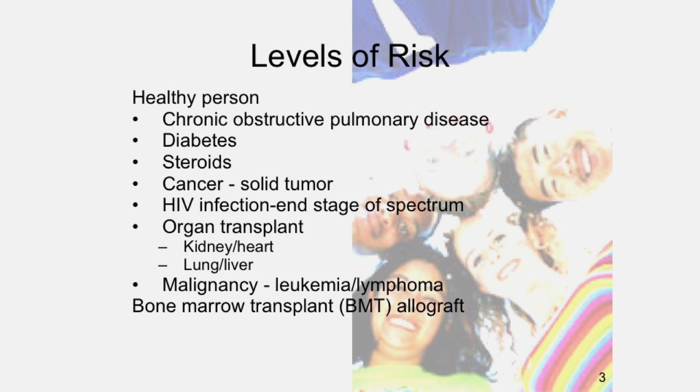Slide, please. What you see during construction is risk. We certainly focus on long-term convalescents, ICUs, immune-suppressed patients that are classified for the reasons that we see surgery, radiation, high-dose chemotherapy, catheters, and areas where we do equipment cleaning. We need to be aware of those, and the procedures in specified areas become an issue, especially if we create a depressurized negative pressure zone to do some kind of effort, and we certainly will recognize those as we go through this. The procedures at bedside or specified areas are really what are important to realize if there's going to be a breach in the competency of protection in that zone.

Issues for environmental infection control, utility outages. How do we do them? How do we plan for emergency outages? Do you keep a 50 horsepower motor around that, as always Murphy's Law would have it, would burn out when you're under construction or under renovation?

Ventilation management, and it's always important to remember the simplest approach to this is to maintain clean to dirty airflow. Patient areas are clean and the construction zone is dirty, so I don't like the term negative pressure rooms, because one side of the door is negative and the other side is positive, and which one are we talking about?

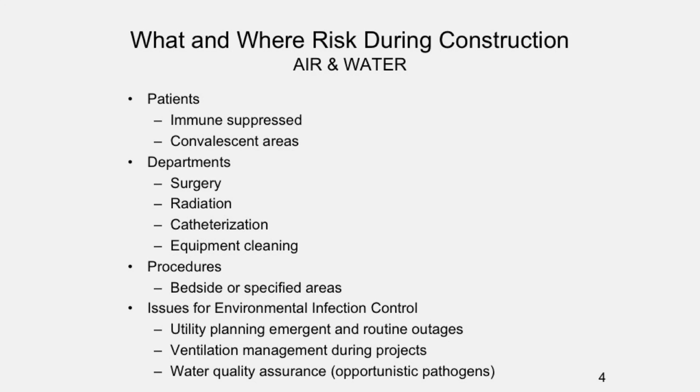When we look at internal construction, which is what we're dealing with in renovation, we really need to be aware of the highest risk times, and preparing the site is one of those. I worked with a facility just recently where during that discovery period, reclaiming the Pyxis machine or some other device that's been sitting around for the last 20 years, suddenly you move it and see what accumulates behind it. I'll show you some graphic pictures on that very shortly. So it's a matter of being aware when the risk is greatest.

When we salvage things off the walls, like toilet bowls in some institutions, what's left behind is a moldy piece of material that unfortunately a lot of institutions don't prepare for by making the seals and barriers before we start removing those things. So that's discovery, and during discovery you end up finding a lot of different things.

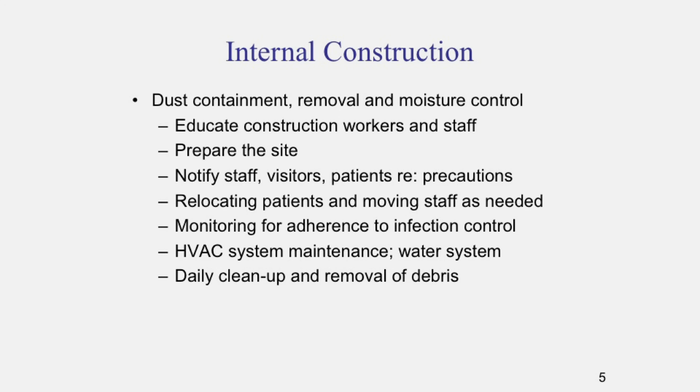Barrier management, next slide, is really the name of the game. So is it solid or plastic? We tend not to use plastic because some folks are arrogant enough, or dumb enough, I'm not sure which way that goes, that they walk right through the plastic barrier. They think they're more important than anything.

I've seen it where physicians and medical staff cut through a construction zone. That's one of the reasons why we use solid barriers and locks on those zones, simply because we can't have anybody getting hurt in an area where they're not trained to walk through and deal with the hazards in a construction zone. So frame barriers, tape barriers, ceilings, doors are all things worth talking about.

But the important thing to recognize is smoke control. We'll get into that momentarily, but it's all about pressure management. Pressure management is infection prevention. You control the way the particles move, regardless if they're human-generated or construction-generated.

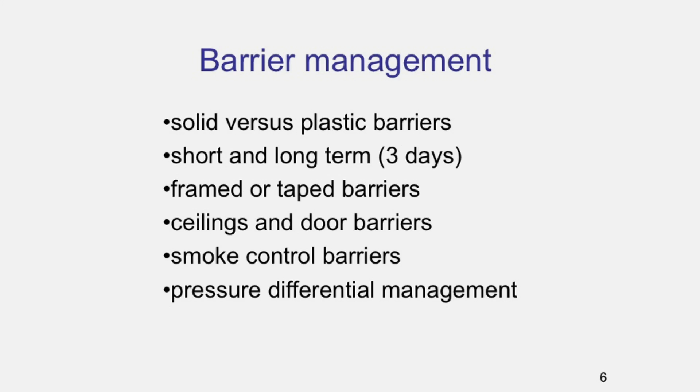The next slide shows a variety of barriers. The middle one up on top was used to mitigate a mold source in some of our walk-in coolers. When universities and big institutions cut back on the temperature of chill water, it exceeds the ability of the chill water to remove the moisture. That moisture moves downstream and finds a colder spot, which is our walk-in coolers, and we end up with moldy boxes. That's unfortunately sometimes what we need to be aware of.

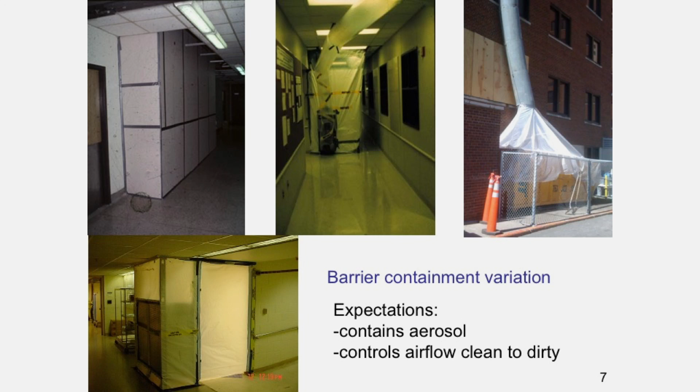Whether or not we have chutes containing the dust, or double portable filters like the lower left-hand corner, those were in a pharmacy during remodel for the 797 requirements, and we needed two of them to maintain the negative pressure simply because there were so many leaks in that space.

Recognize that anytime we go into a space to do major renovation, which is what I'm talking about, we go into a period where we disengage the fire alarm system because of the aerosols and the welding and that kind of stuff that are normally generated during a renovation project, and that is interim life safety.

They both work for the same goal, controlling the aerosol. In one case, it's something associated with construction. In the other case, it's something associated with smoke control.

So that is a very beneficial concept that does not add cost to the project, but requires fire watches, requires extra sensitive management, and the security staff can be trained to simply look for two things: which way is the air moving, and is there any water coming out from underneath the door?

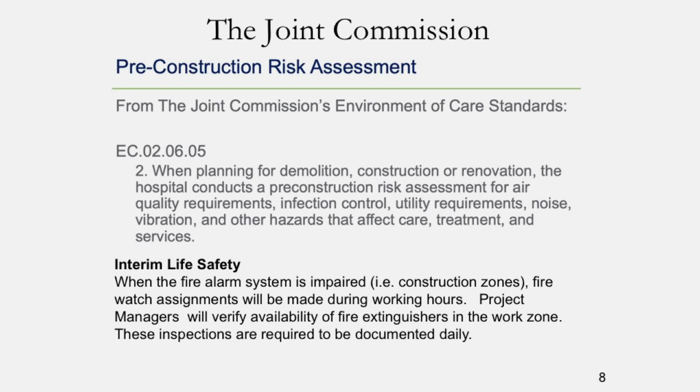Very important. Likewise, on the next slide, slide 9, we have what we used to put on all of our demolition details when it came to plans and plan review by the contractor and ourselves, stating some pretty simple things. I underlined a few of them that I think are important - one, dealing with notification and knowing that infection control has a say.

We also want to make sure there's training by the individuals coming in and doing the work. Likewise, we request and insist, except maybe for critical barriers like fire barriers, that flutter strips or some kind of airflow indicator be put on our barriers so people recognize what's going on and evaluate that appropriately.

Portable filters should be used. They work, we'll talk about that. We should coordinate debris removal and get the stuff out of the building expeditiously, but not necessarily during peak work time. So we need to think about the best times to move supplies in and out. Is that premium time, afternoon, or morning time?

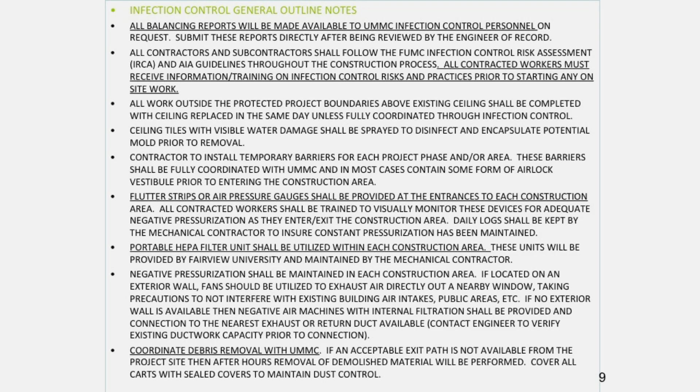These are some of the issues, and I'm not going to look at all of these and consider them. You can read these at your pleasure.

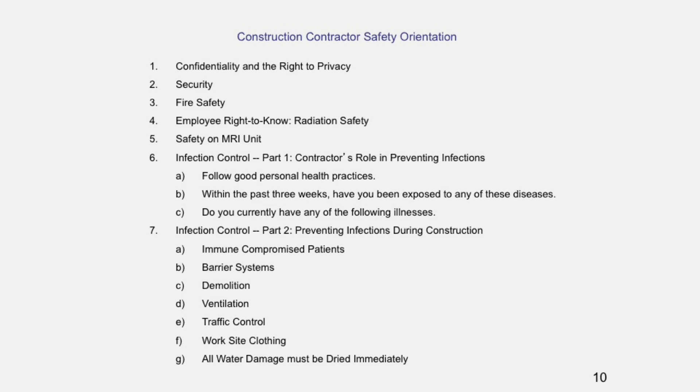So what we have is a first day, first hour format. Every contractor, every worker needs to come in, sit down, and listen to a whole variety of things, which you can read here, looking at what we need to consider for the contractor, as well as prevention of infections during construction on a variety of issues. It's roughly a 15-page document, and unfortunately that's often all they get. Having done this a few times, those eyeballs go smashing down in the middle of that, and the comprehension is concerning.

Looking at slide 11 and the practice of spreading these germs, again, is really important to understand, especially the chain of infection. I can see the eyes closing now.

We want to put one thing in everybody's mind: in our situation in the United States, if the Joint Commission comes in for review and interviews the workers in that construction zone that they walk by, and asks that construction worker what they do for infection control, it's written in red on this slide. So we can always answer: wash your hands. They might not be able to recite everything covered in this training program, but they can certainly say that.

We are concerned by the fact that some construction workers in Virginia some years ago complained that one of them developed tuberculosis while in the hospital. But infection control practitioners, being astute, reviewed the records and said we had nobody in the hospital at that time that we knew had a tuberculosis infection. So again, where did they pick it up? McDonald's, Burger King, the hockey game? I don't know. So again, we need good records and cooperation between both groups.

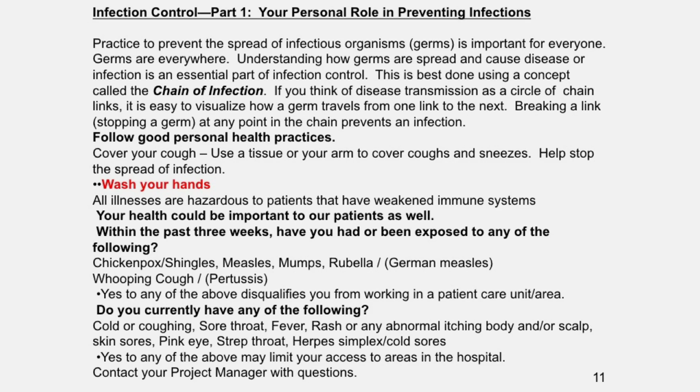On slide 12, we start getting into the patient issues and bad immune systems, ones that aren't functional, and some issues on dust, barriers, vibration, noise, and that kind of stuff. Again, the eyeballs are starting to get heavy because they have a lot of things to worry about, and it's been cold outside, they've got heavy clothes on. And again, what do they walk away with? That's why training becomes such a huge issue, and extracurricular training outside that institution is important to understand.

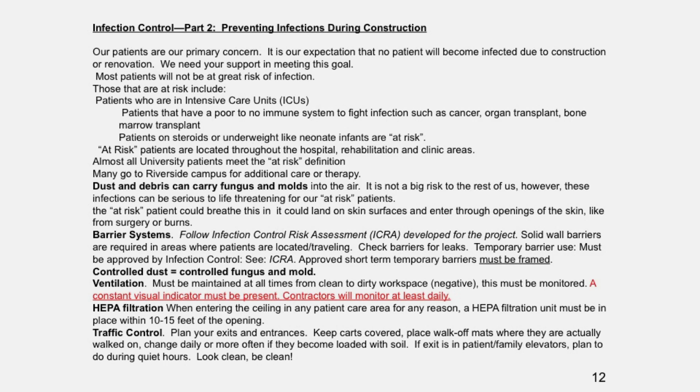It also recognizes, this document recognizes, the high risk areas and what we should do. Slide 14, we really look at a risk assessment.

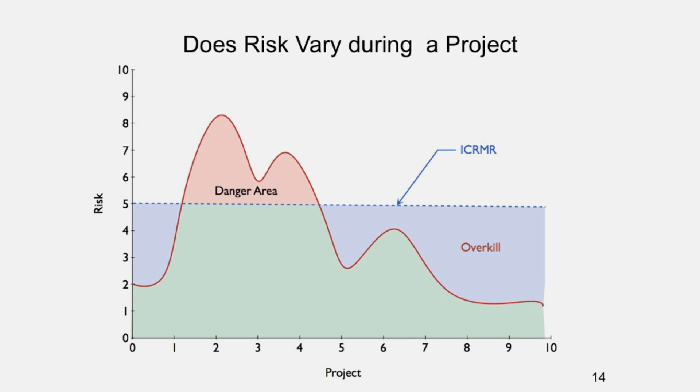If it's 100% risky, it's on the left side, or on the y-axis. If we have phases of the project on the x-axis on slide 14, we have a variation in the risk going up. As we tear the unit apart, as we do demolition, slab to slab, wall to wall type of effort, and then start to build back, the infection control risk mitigation response starts to drop. But this is variable, extremely variable.

If, during the middle of the project, someone needs to flood the floors upstairs and the water comes raining down, all of a sudden the risk goes up, or a flood occurs, like a sprinkler head breaks - that can happen - and that may change the risk factors in 8 and 9.

Being able to make that risk mitigation response is something that is expected in the environment of care and CMS, Centers for Medicare and Medicaid Services requirements. It's important to be able to respond and understand what risk is and how it changes.

Looking at disruption avoidance planning, these are examples of two written word signs, if you will, projects that our contractors put together, indicating how equipment was going to come in and out, what the hours of operation are, and who to contact.

Which are all listed in that space. Some of the special precautions include protecting the floors. The one picture on the right is when we were putting in our hybrid operating room with CT, with very careful instructions on how to get in and out of the operating rooms and avoid disruption.

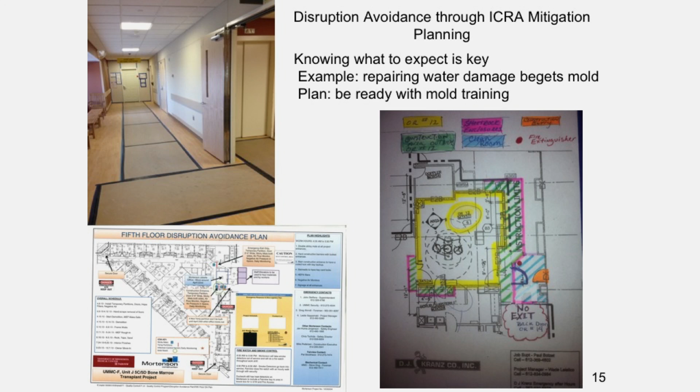I wish I could talk about this project as a case study, because it was an interesting recognition of things we did that were good, and things that we didn't do that created additional problems. This particular project was fascinating because they had to reinforce the steel to hang that CT scanning device, and the iron workers did the impossible, trying to put 1-ton beams into the structure to hold up the device. I have the greatest respect for the work that they do.

In slide 16, we can see what was the first usage of portable filters. I think it was the first publication we put out in 1983 that describes how portable filters can be used to protect. We were lucky, had 12-foot ceilings in our bone marrow transplant unit, and we were able to hang it on the wall with a large volume of air change rates, and with data that I collected inside.

This became the evidence, if you will, that demonstrated that before you turn it on, there's lots of junk in the air, but after a few air changes and after 36 minutes at the air change rate, they pretty much ate up all the particles in this particular demonstration. So we know they work. They just don't work against anything that's coming in from the outside unless it's a really small leak.

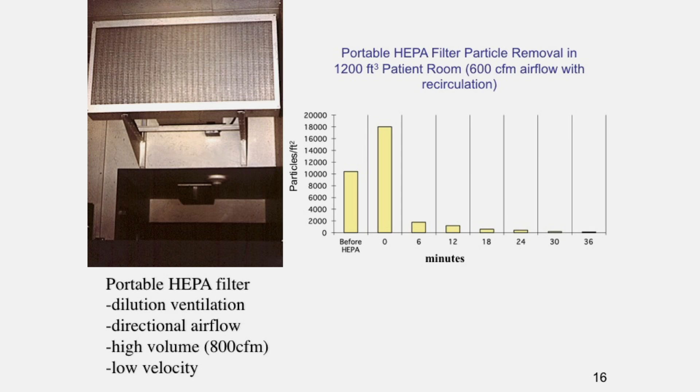So we have to know how they work, and certainly there are a whole variety of portable HEPAs around in slide 17. We have ones that recirculate the local air. In the lower left-hand corner is one which we are using when we're putting in an access panel for getting MRIs, our magnets, in and out of the building because they change as things improve.

So portable filters are important for air delivery. High filtration gives us a dilution ventilation. Of course, the solution to pollution is dilution, and it is something that is very useful to reduce the possibility or the probability of breathing a harmful spore or other kind of harmful agent. The volume output is really what we're looking for to determine the air change rate.

There is a noise factor. We do have HEPAs, which are 99.97, and they want to be sure they're adaptable for multi-usage, and that's really what we see.

Looking at slide 18, here we're doing some work in the control area of the operating rooms, and it is a sensitive area, and we actually attached the portable filter to the structure. If you could look up by the exit sign at that blue spot, that is a nickel's worth of flutter strip.

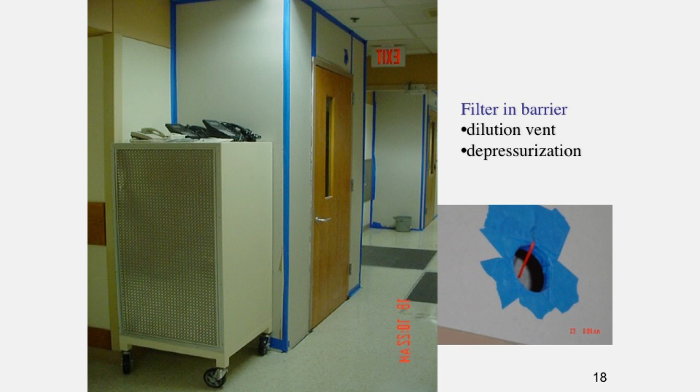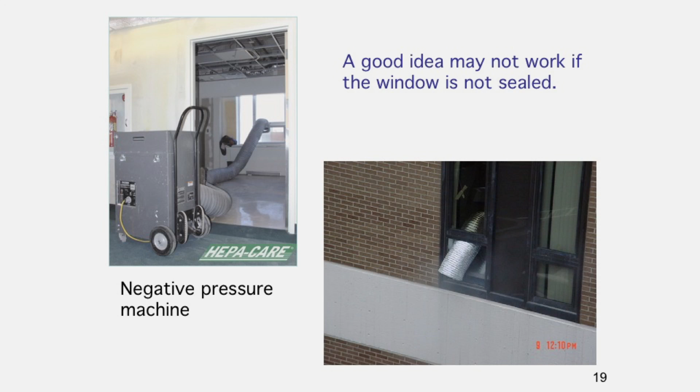All of the rooms were positive where they had the negative pressure machines. It was blowing out into the corridor. Fortunately, what they were doing was paint. They were painting, and so paint particles were coming out. But again, there's a need for training. Likewise, there's a strong need for training on how to put up barriers.

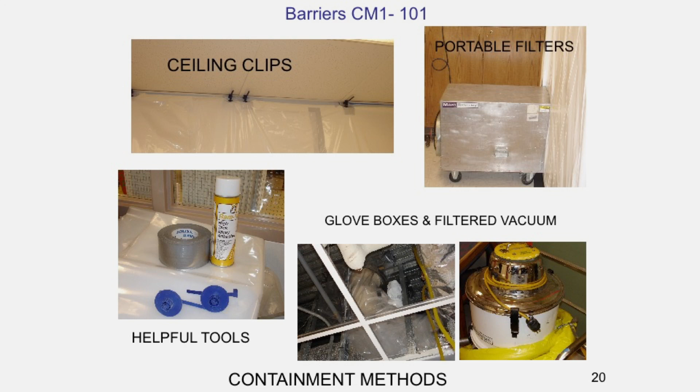We were putting up barriers here to deal with, in the bottom center picture, roof sink drains and roof drains. We had to do that right in the clinical space during daytime, with good barriers, portable filters, and HEPA-filtered vacuum cleaners, and a knowledge of how to use helpful tools in putting up that barrier plastic. It becomes essential, especially if it has to be done during daytime hours, and there's no reason it can't if the individuals are trained, especially on a short project.

What we're most proud of is the fact that the carpenters in North America, through their union, created a best practice in healthcare construction. This training has pretty much taken away a lot of the work I used to do, because it's now available from the carpenters unions for nothing.

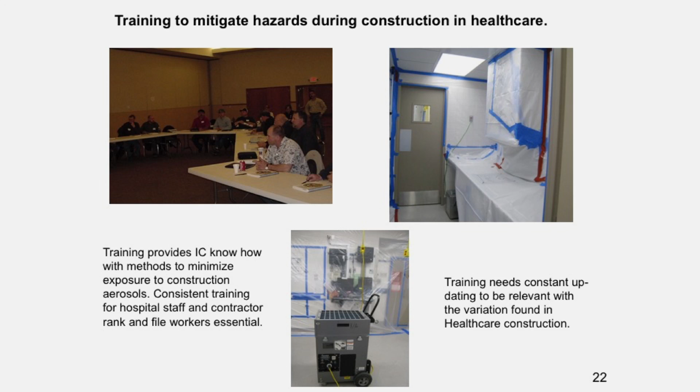The next slide, 23, shows what you find when you start moving equipment. Some of the riskiest times are when we salvage the equipment — computers, refrigerators, toilets — that kind of thing. Dialysis cabinets are a notorious place for water damage. Our sustainability efforts are to put water-resistant rock around every water source, including dialysis cabinets. At an institution in California a couple days ago, we really stressed this as a sustainability issue, especially for patient safety and employee safety, because as we move that equipment, we don't know what we're going to find.

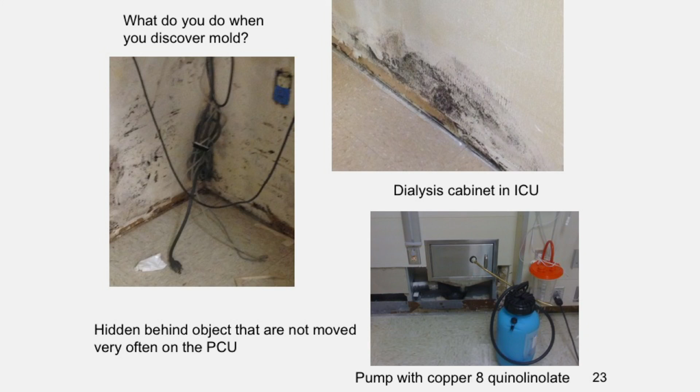I've got more examples on slide 24, where we have leaks from our cooling coils. We remove sinks from our ICU, and what do we find on the gypsum board in back? Mold growing. So that's a moist environment, and again another reason it justified putting water-resistant rock on those surfaces. Books can get wet too — oh my gosh, this is one they didn't want to throw away, but they had to.

Likewise, the MRI table support — that's all Aspergillus fumigatus — and the carpenters didn't know what in the world I was talking about. But they understood it was a risk after I finished, and it certainly warrants good training on how to mitigate that, which would be simple: a detergent in a bottle of water, sprayed as a fine mist. It locks it down just like it locks any kind of particle that is water resistant. It cracks and knocks down the surface tension in an effort to do that.

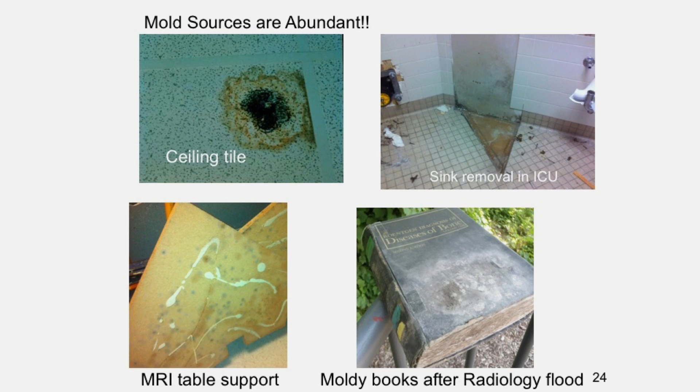Next, slide 25 has to do with airflow indicators. We want to see, as shown in the indicator in the middle on top, the air blowing in the wrong direction, which indicates a need to look at it. In that case, a fan became unplugged that was supposed to exhaust the air. The standard is the metal one in the right-hand corner for our institution — that's what we put on all our barriers as an indicator. It's reusable and unfortunately somewhat expensive, but that's what we want to demonstrate.

And the bottom chart recorder, the disadvantage of that is they use it over and over and over again. You don't know what you're looking at in many instances.

Slide 26 is a picture of a barrier being used on our bone marrow unit, and the significance of that is the whole aspect of perception. Mom walking by outside wonders why are you working on my child's room? Oh my God, how do you answer that question? You have to do it. If I show up, and I've had to do this many times in my career with these environmental containment units or whatever efforts going on in our bone marrow wards or other places, then you need to have an explanation for why you're doing it. That's why it's important for staff to do that.

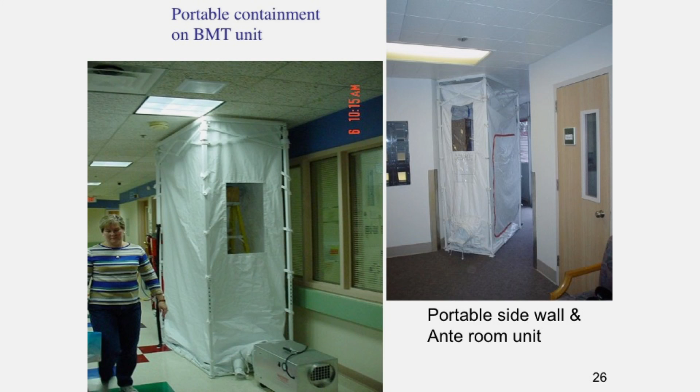There are a variety of these kinds of units, ante room units, and there are also those that when you work on something like a cooler, because the condenser doesn't work anymore, you're not cooling the water, you open it up and suddenly find it full of dust. We can certainly use these containment units or some kind of barrier or portable filter management for that work when they need to work in that area and clean it up before they start taking it apart.

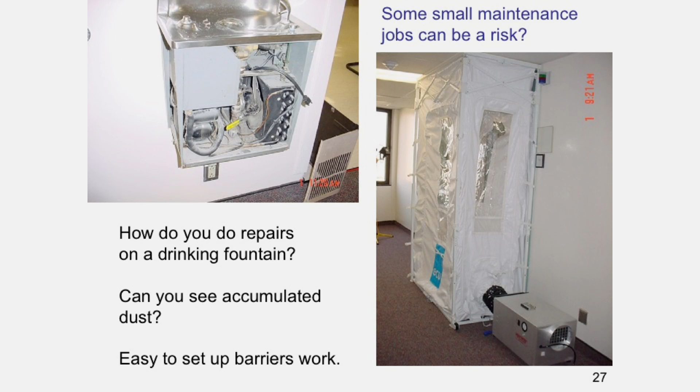We also have fun with our barriers in slide 28. This was a Carolina hospital in a pediatric ward. They made a cute little plaything of that, but then another individual gave me a picture of how not to use a portable filter, and you never want to dry... you'd be amazed what's on that mop. I have many stories about that kind of thing.

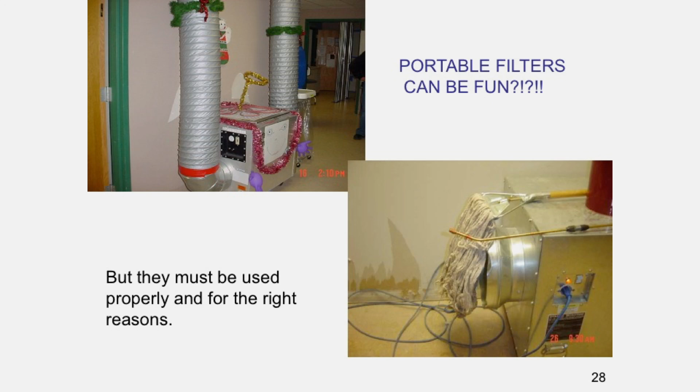What we did some years ago on slide 29 is got money from Homeland Security here in the States and put together airborne infectious disease management methods for temporary negative pressure isolation. Temporary negative pressure isolation is exactly what we do when we do construction, and I actually put a sentence on the first pages that says these are the same methods you use not only for containment of bio threats, out clusters of infection or epidemics, but it's also something you do during construction, so you can practice how to do that. And we expect our carpenters, if they're volunteering, to come and help us put together additional isolation wards if that's what the plan calls for.

You can get this, it's free. It's taxpayers' money, that is on the bottom. I think I checked that, it still works. We've distributed it around the world to show people, through the World Health Organization, how to use duct tape and plastic, and it does provide some useful guidance when work is done.

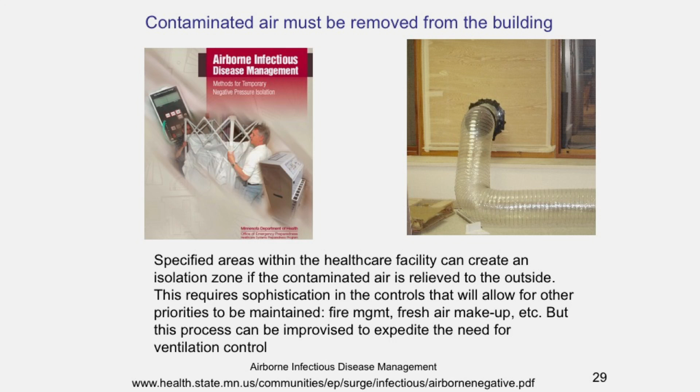So you need policies and procedures. You should have a statement that says they're routinely evaluated, and the volume output should be determined, and that's Q equals velocity times area. So if you've got a 2-foot by 4-foot opening on that portable filter and it's moving 100 feet a minute, you've got 800 cubic feet a minute that you use to determine your air change rates. There's a criteria in here for checking the filters as well as looking at the output in locations, as well as how to maintain it.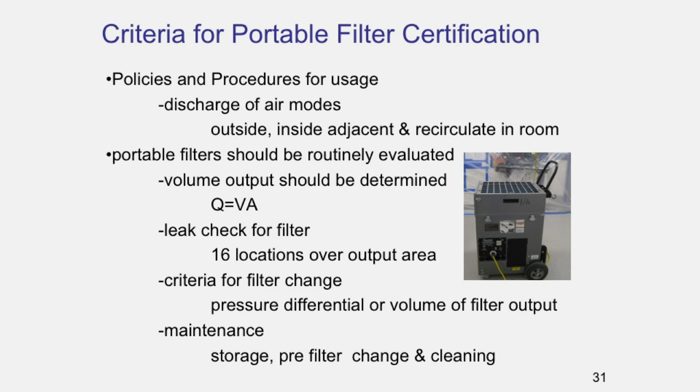Slide 32 is an example of a policy, a protocol that a mechanical company had to follow in an effort, again, to use HEPAs in our facility when we were doing tie-ins, when we were tying buildings together, and we needed that HEPA filter. It gives some specifics, and when Peggy here comes around with a portable filter particle counter, she can determine if there's any leakage.

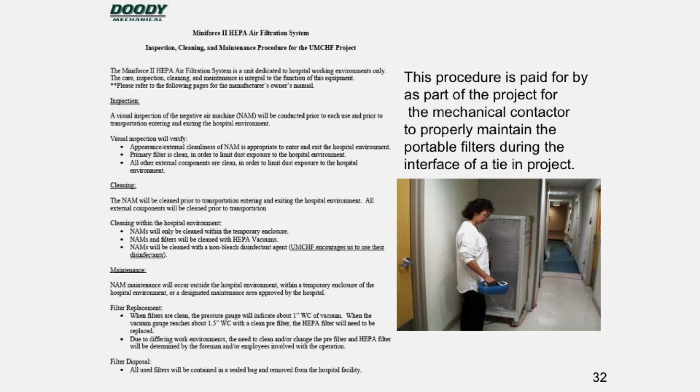She can check the flutter strips to see if they're working. In her case, on slide 32, we're actually remodeling or expanding our neonatal ICU, and she was charged with that area to make sure it's working right.

Phasing is a big deal on slide 33. This was, I think, a 6 or 7 phase project. That would drive most people crazy, and in some instances we hire a nurse to help coordinate the phases, like the ICU. But multiple phases like this are very difficult. Sometimes it's easier to just move all the patients if they've got the room, or in this case they cut the project in half and flipped them back and forth to get this pediatric wing in our hospital taken care of. Henry here was a big help in coordinating when patients could be moved and the criticality, so there's enough staff to do that. Coordination is an essential concept.

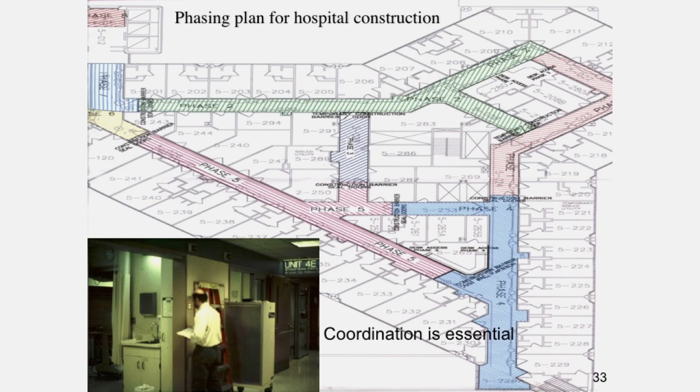Now this particular slide, 34, is a way that we can ventilate anterooms. If you've got a portable HEPA, you can blow it out and suck the air in from both doors, or you can blow it in and create positive pressure in that space. That then may become the best place for donning and doffing. Likewise, if there's no portable filter, you can get the air blowing right through.

Some contractors, because they recognize this as a big deal, especially in operating rooms, bone marrow transplant, oncology, or neonatal ICU, if they're using a concept like an anteroom, put in pressure sensors that actually beep the contractor after hours. That's a big deal that needs additional explanation I can't get into today, but that's now the best practice we'd really want to promote. How you bring the contractor in becomes a really big deal, especially if you don't make the right call. We don't want to yell fire too soon, because we need to understand why the pressure dropped or increased, if that's the goal of that pressure monitoring device.

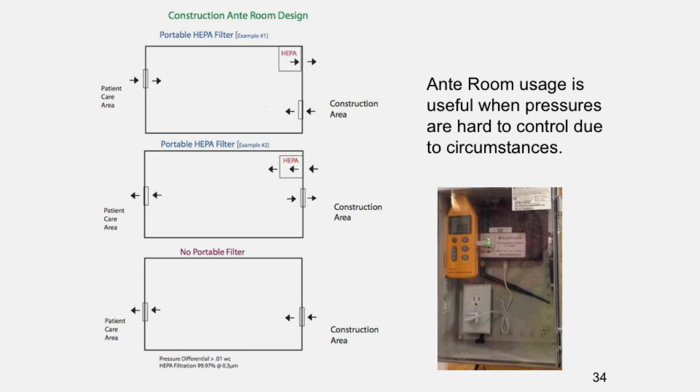Slide 35 shows some basic precautions covering debris. Make sure that's done. Portable filters in the corridors, outside of rooms, in patient care areas, walk-off mats that should be changed more frequently, and signage demonstrating it's a construction area, keep out, and an appropriate airflow monitor that indicates which way the air is flowing.

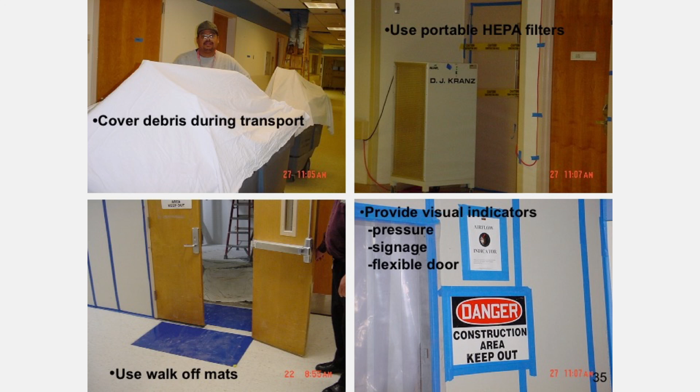Slide 36 shows a project we did where we were changing out tomographs. We had a linear accelerator, I believe, in this room, and we were putting in a tomotherapy type of gadget, and they needed to realign the slab. So they had to jackhammer out the space and put in new concrete. The problem was the equipment room, where we had our brachytherapy equipment and our simulation room. This room was used about 10 or 12 times a month, and they couldn't move it — that would be a really big deal due to the regulations involved with radioactivity.

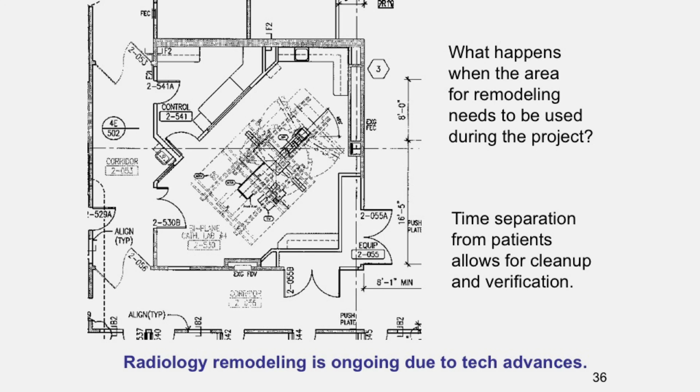So on days of treatment, which were scheduled, the guys knocked off early, say 2:30 in the afternoon. They cleaned the space up, we brought in portable filters and the equipment to be used, and when we got down to baseline — what the particle counts were in other rooms in that radiation therapy unit — we went ahead and moved the patients in. So here we've got cooperation to make it work, because these aren't the highest risk cancer patients, but yet we don't want to be cavalier about the way we do things.

Unfortunately in the United States the true regulators are lawyers, and we settled a case on the East Coast last week where a young man with leukemia developed an aspergillus infection in the eye. His room butted up to a construction project where they were remodeling a dialysis unit, and the pictures showing mold on the wall were amazing. Unfortunately we won't know much more about that, because it's protected by client-lawyer privilege.

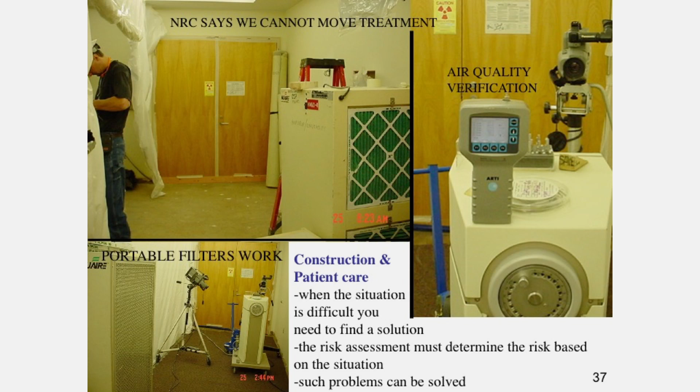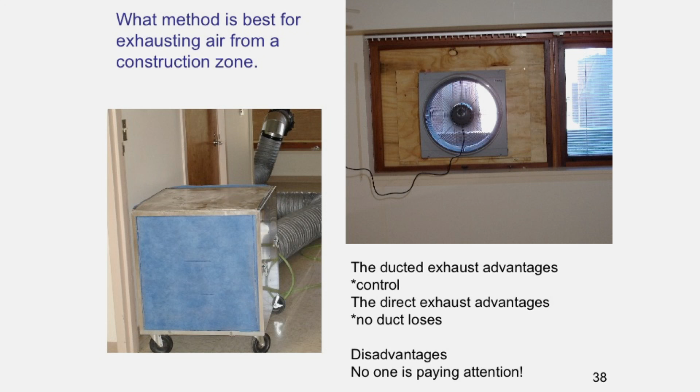Not good. We like ducted exhaust systems to control the airflow. If you look at the ducted system on the left, you'll see a hood over the flex duct. What you don't want to see in slide 39 is, as I found one time inspecting a construction site, this is what I saw: that ductwork was completely disintegrated. It was not doing its job.

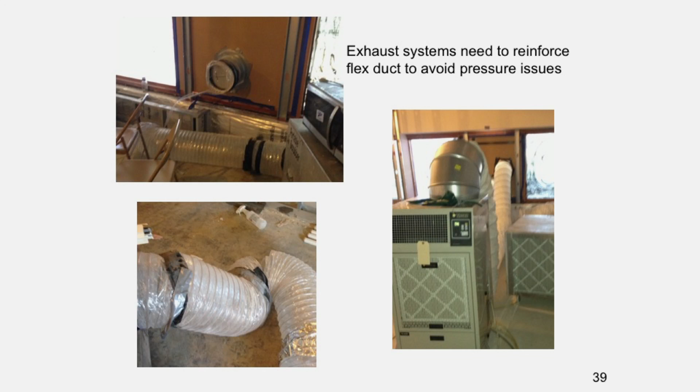That supervisor was discharged because he was not doing his job that we mandated to him. It's one of those things where our project managers can discharge an employee, send them back to the bench, if you will, if they do not know what they're doing. In this particular case, there's no excuse for not doing it right. That's why now we mandate that all of our flex duct have caps on the points where they vibrate so that they don't come apart.

Likewise, this is what I saw in Atlanta some years ago, where they were doing work in the fan space where they had the big fans. It was over 90 degrees in there, and they decided they were going to put a 4x4 in the door to ventilate that, to keep it cool so the guys could work. There were 4 fans: 2 patient, 1 surgery, 1 public. Which one did they pick? They picked the public one. Was that good planning or luck? But if you're going to steal air from the hospital to do something like this, know what you're impacting.

You never want to take that away from a critical patient care area like an operating room. There are a number of things that you need to do in a hospital to manage it. I've been involved where window seals don't work, where the entrance of the hospital isn't pressurized, where there are leaks because the building wasn't put together right, road cleaning wasn't kept up. You could go on and on, but these are examples.

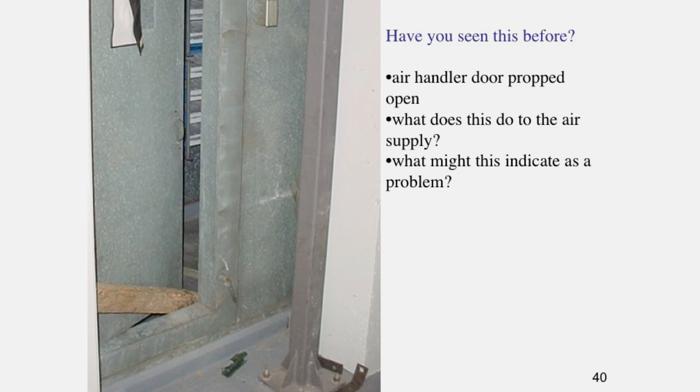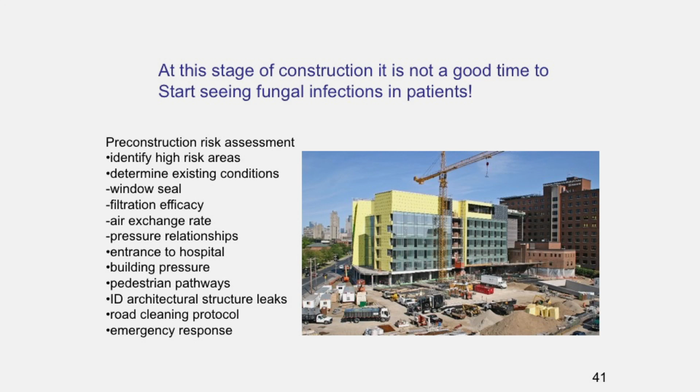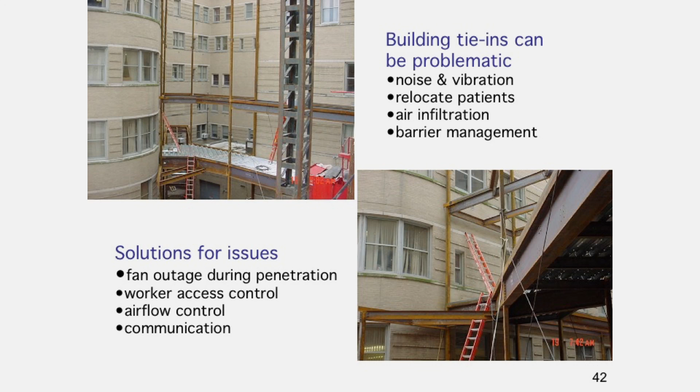Slide 42 shows tie-ins. Tie-ins are unique because tying one building into another can create airflow control problems. When you see on some of the windows the green moss growing, you know that they've had water exposure, and being wood windows, they certainly could have mold. So tie-ins are very important to control, and there are some specific measures that could be followed. We just need to mitigate those before those walls come tumbling down.

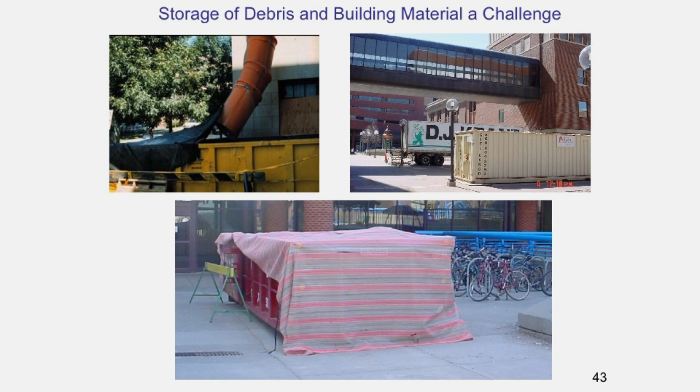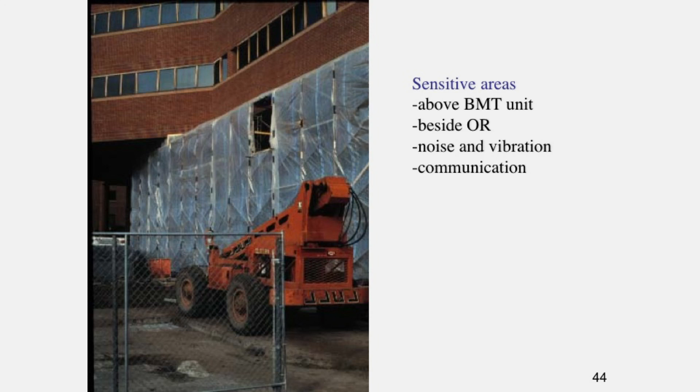Slide 44 shows where we were tying together an operating room and a bone marrow transplant ward on the floor right above. Under these kinds of situations, when they had to take the brick off some columns, the noise was unbearable in the patient room. We had to find another room for them with portable filters to bring it up to the air change rate and filtration that's necessary—that's best practice for managing BMT patients. In this case, we had to move them for a very short period. It only took a day to do one column, and there were 4 columns there. So they had to move the patient several times in an effort to mitigate the noise problem, but keep the patient safe using portable filters.

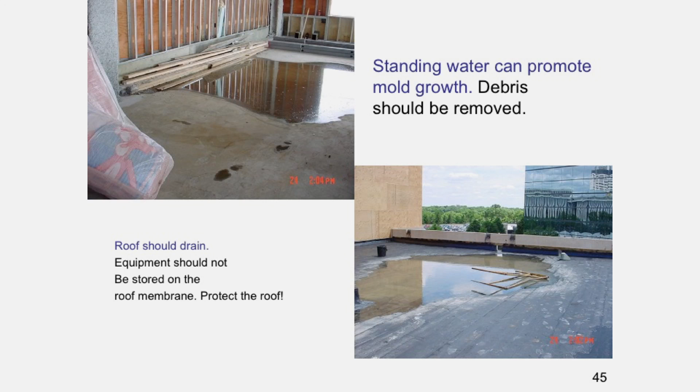Whenever we're finishing up a project, one of the things that happens, and it's happened in major institutions, sprinkler heads go, and you don't have time to get the equipment. So we have water damage carts, water response carts that have vacuums, boots - I never know where the water's coming from - extension cords, all ready, squeegees to get the job done as quickly as possible.

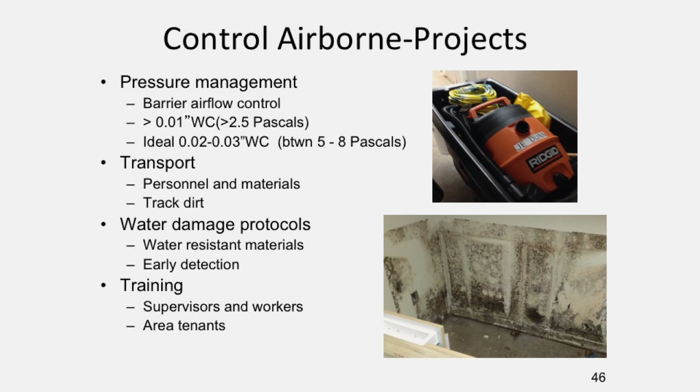Because if you don't take care of leaks - like this was in a critical care ward, a washing machine they put in for the benefit of the patients and long-term care - my goodness, that's a lot of mold. A slow leak will do this, and it can happen behind the ice machine, in a bathroom with a slow leak that nobody uses, like a residence room. We need to be careful when humidity rises to meet the criteria for mold growth.

Ductwork - keep the ductwork clean, protect it. I sit on the National Air Duct Cleaners Association, and while visual is important, you shouldn't be able to write your name in it. What is it that we're really trying to do? SMACNA, the Sheet Metal and Air Conditioning Contractors' National Association, really has some visual guidelines for that.

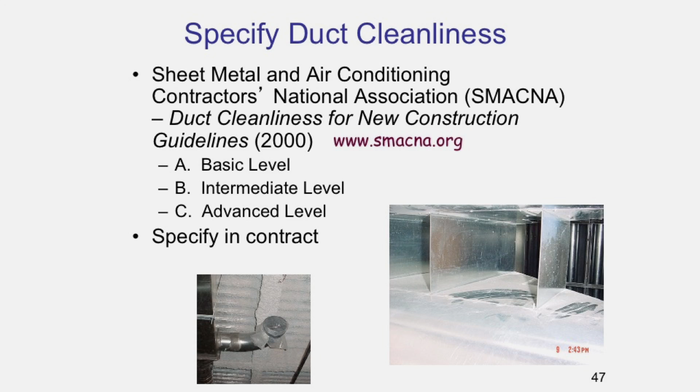Informing the employees is really a good thing. They put signs all the time in elevators - there are sign boards or project boards. Keeping the employees informed and letting them know that you've got the best efforts going forward really is reassuring, not only for employees but also for those that are there with their loved ones.

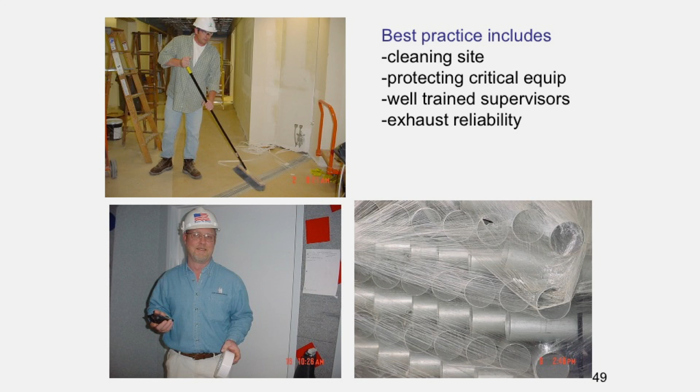Forty-nine, we like enlightenment. Keith is an enlightened supervisor for the job - radio phone in one hand, duct tape in the other, going around making sure critical equipment isn't being contaminated by shrink wrapping it, as well as making sure all our ducts, our barriers, ducks in a row, if you will. Value engineering - the Association for Professionals in Infection Control put together a manual, best practice for infection practitioners.

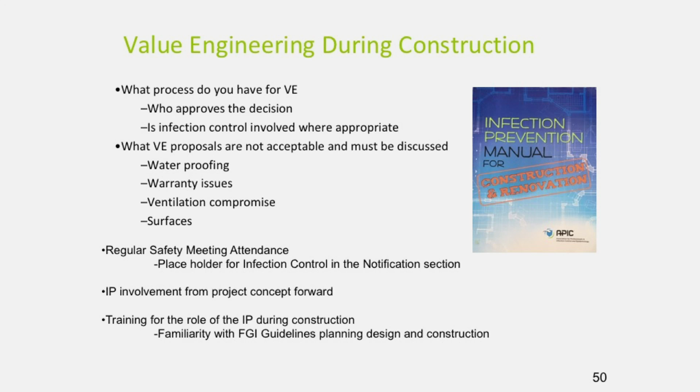We have several chapters in that, and certainly one to discuss about how best to deal with construction. Your safety meetings are the best place for infection prevention to be involved. There should be a placeholder for that, to voice the concerns of infection preventionists and so on.

So we should also have forms for risk assessment that describe areas affected, work description, start and finish dates, work hours, notification, permits - like, is an infection control permit required for this one? Is there noise and vibration that raises perception, and who are the people we need to contact, and what are the meeting times?

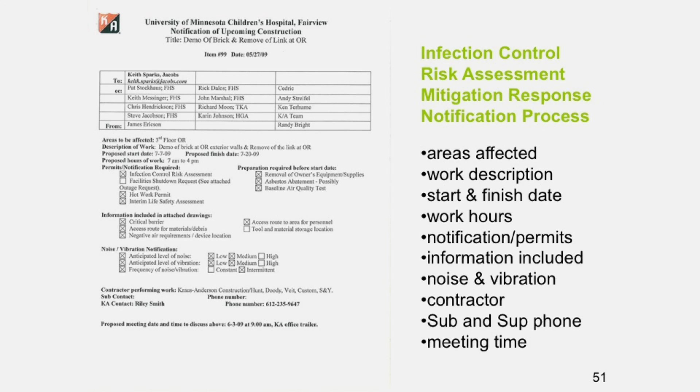So these are all things that become very important when dealing with construction best practice, and keeping it clean is a huge part of that. And when you're jackhammering very thick walls in the radiation therapy department, that really creates problems - ones we have been read the Riot Act for from patient relations in the past.

So how you notify or move patients away from that noise, which has to be done all night long, is really something that will raise perception.

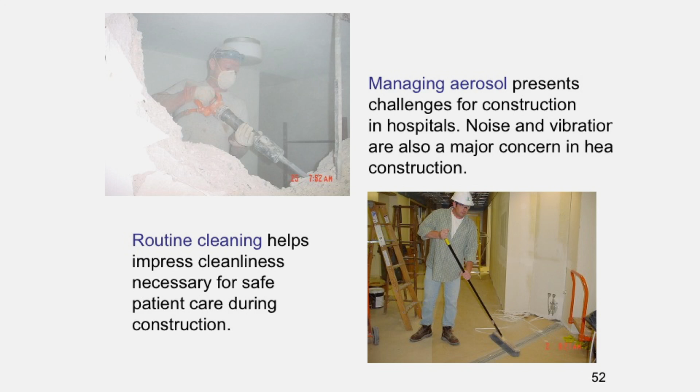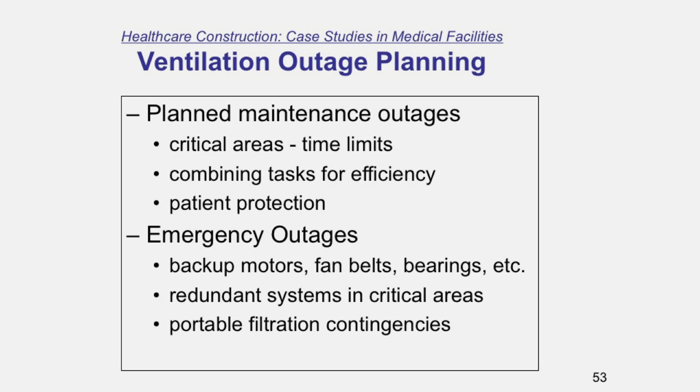Outages - there are planned ones and there are emergencies. Where are the critical areas? Which ones cannot tolerate outages, like operating rooms or bone marrow transplants? We keep backup motors on hand, fan belts, bearings, and if you're particularly enlightened, you're putting in fan walls with redundant systems, and also portable filter contingencies, which we have a lot of sitting around.

There are all stories associated with water management in healthcare, and I get to do that next week in Milwaukee. So it is a topic of import for hospitals.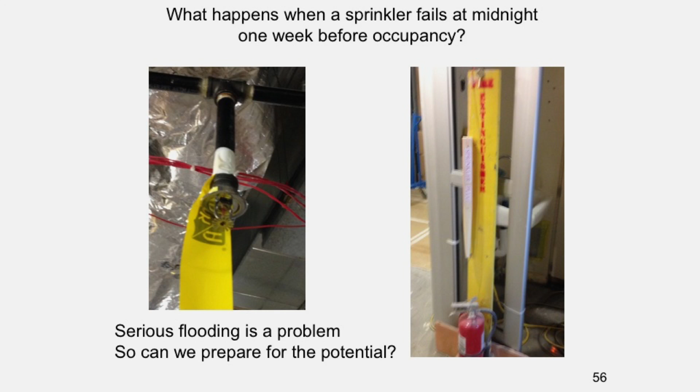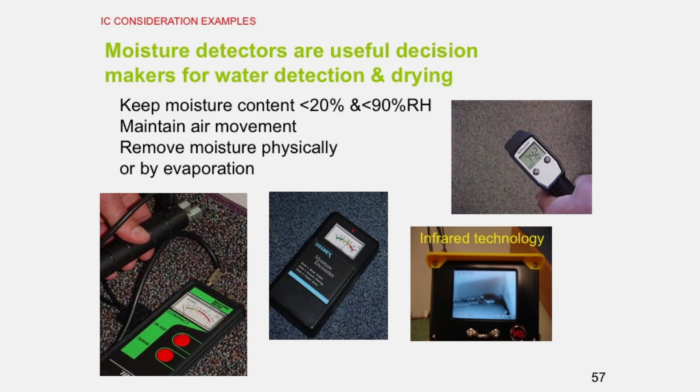Water detection devices are good for the hospital to have - pins, conductivity, infrared. I can't say enough good about infrared technology, because you can actually see rather than feel where that water damage is. The infrared works on evaporative cooling, which you see in slide 58, where heat is coming through the walls and cold steel support beams are in there. Condensation is occurring, and that's why you end up with mold on the right-hand side of the picture.

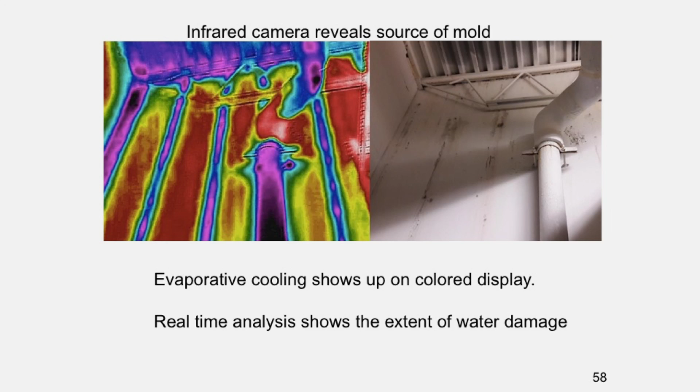That mold, again due to condensation, is especially bad on the diffuser in the panels above in this slide. The mold happens underneath a sink - the one on the right was an Atlanta hospital where they didn't have good plastic laminate sinks that were sealed, so water seeped down. I can't imagine the number of spores released into the environment by pulling it up.

The bottom right hand is a Minnesota hospital, not mine. While there's mold growing in there, there's also an exhaust fan dissipating heat from a flash sterilizer in operating rooms. What I worry more about in this slide is that mark on the left panel of the lower right-hand picture. Is that an individual saying, I wonder what this junk is?

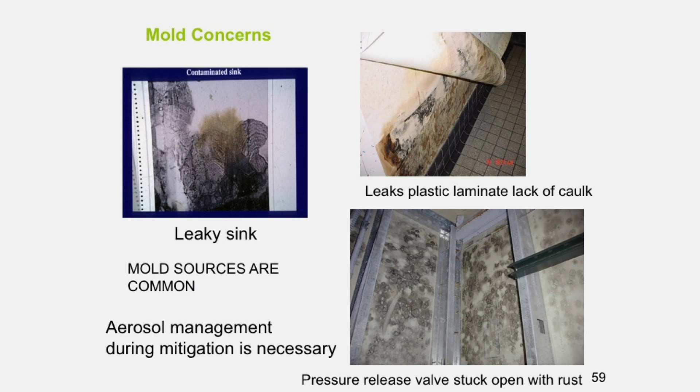Sampling - I've got a few slides for monitoring, and slide 60 shows a very common device used by industrial hygienists that identifies spore morphology to make a tentative genus identification. The lower right hand is an Aspergillus fumigatus spore head - you can see prolific spore production there. Must have been a good food source. But that's what we worry about, prolific spore production. They say one head can produce 10,000 spores. Neither here nor there, but it's something to be respected in a hospital environment.

Slide 61 gives us some interpretation. We always say don't sample unless you know how to interpret your data. Indoor-outdoor ratio - you should always see lower counts inside than outside, unless there's an activity raising those numbers, and then you've got something to talk about. Indoor problem areas differ from non-problem areas, so we always do a comparison of Ward A to Ward C.

Indoor organisms are not similar to outdoor organisms unless you have just a lower number, because we shed. So we essentially bring in as vectors whatever spores we have outside. And if you want, you can always try aggressive samples on things like carpet to really raise the numbers and raise your concern.

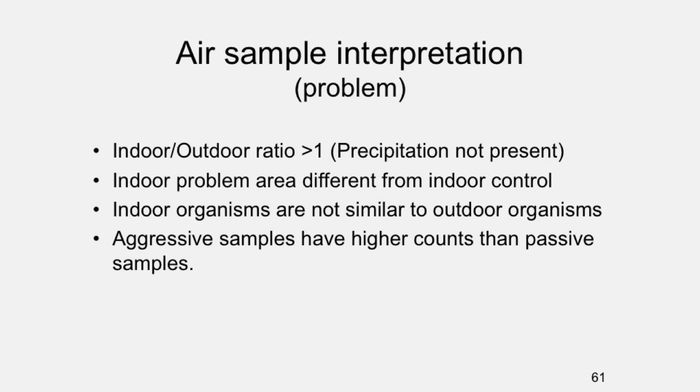So on slide 62, you have the surface sampling strategy: indoor problem compared to an indoor control. You have a plate control to make sure your media isn't contaminated and that you're not contaminating it during transport. You're always looking for suspected poor maintenance, dusty floors.

We worked with a hospital that had contaminated laundry. Every place we checked, all the laundry rooms were fine, but we found phycomycetes in the dirty corridor where the laundry was being stored at this particular institution. So we need to be fully aware of where we can expect to find microorganisms and compare it to some other place.

And then we always look for water damage—when we have that vinyl on the wall pulling away, when we have ceilings that are stained, when we have fuzzy stuff in the room, don't discount it as not being mold. You have to be suspicious, especially when your risk population is at hand.

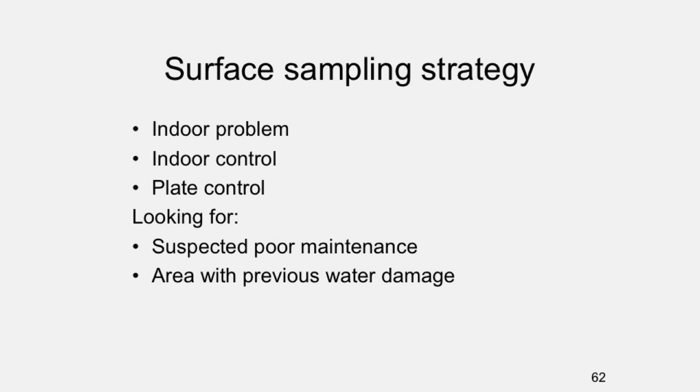Surface sampling method, slide 63. We can use what the industry calls RODAC, but it's generically called the surface contact media plate. It's a nice way to lift the spores, or microbes, off of the surface and grow them up. It's a better method than swabbing because there's a better recovery rate, and we really don't know how to quantify swabs, whereas you can easily count a flat plate.

And there are some public health standards associated with surface contact media plates. We like tease tapes if it's dusty, because we can make almost a real-time analysis, especially if we bring our microscopes with us.

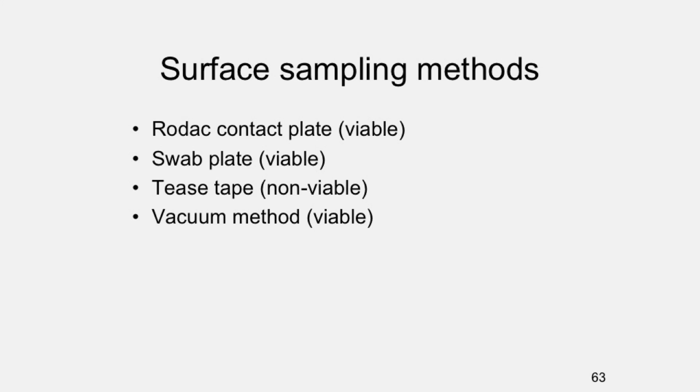And then there's the vacuum method, another viable method, but that's kind of gross. It would be more yes or no—is it really, really dirty, or what are the organisms that would be there? And we do that often when we want to look crack and crevice in laundry storage rooms, as one example.

Next slide brings us back to where we began. We covered a fair amount of ground. I talk fast, my cup runneth over—I apologize for that, but there's a lot to this that I haven't covered, including the water quality issues that are very important in managing the environment of patient care, especially when you have super susceptible individuals that you're monitoring closely microbiologically.

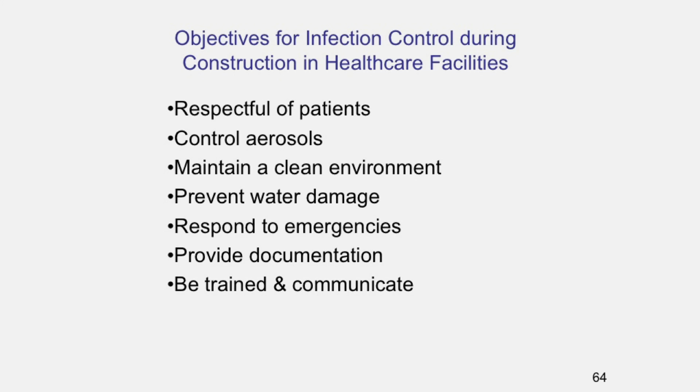Water quality issues do cause problems from infection, as well as confusion among clinical staff when they colonize some of our patients. So as we finish up on slide 65, if anybody's interested in asking a question, I'm game for that.